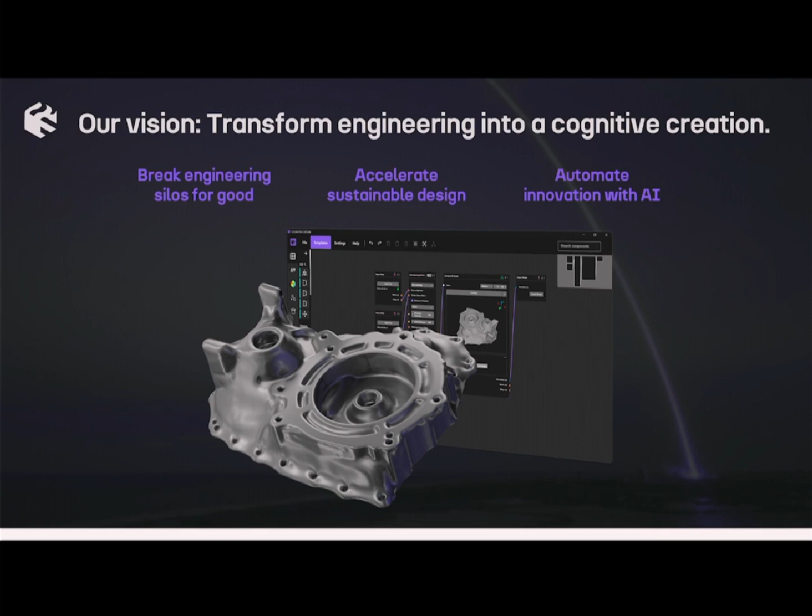I see that a lot of companies presented just before us have also that ambition, and we are all in for that together. We want to accelerate sustainable design. That's maybe a very European thing to say, but it's very important, and I truly believe it has to be the focus of engineers of tomorrow. And we want to automate innovation in the right way by using AI, but in the right way to make it useful.

For that, we are relying on our technology enablers. We developed our own implicit modeling kernel, which gives us enough flexibility to modify and optimize the geometry in the best way possible. We combined it with data-driven design decision algorithms, so we do manufacturability analysis, cost analysis, and carbon footprint analysis, and we couple it with our optimization solvers so we can improve the whole design much better.

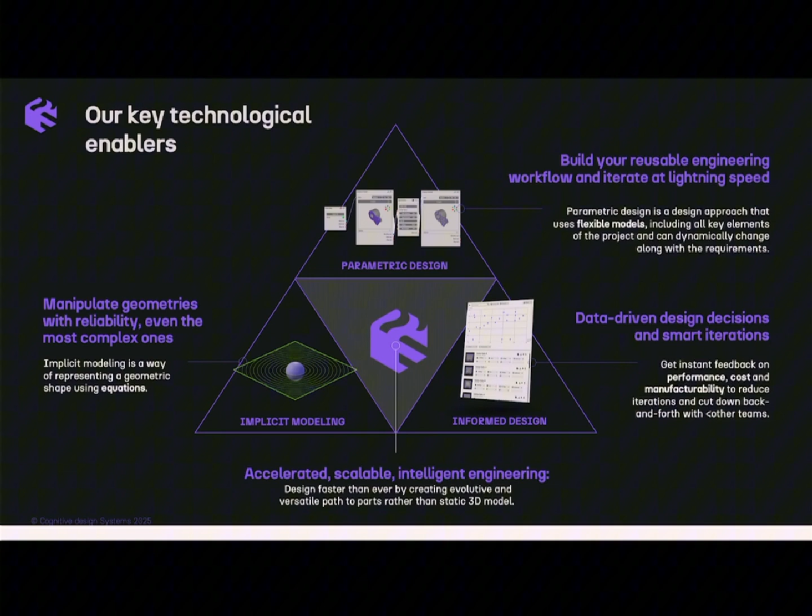And at the end, we have our UI and UX, which is very user-friendly, where we are able to create reusable engineering workflows and iterate faster. By doing that, the whole idea is to create accelerated, scalable, intelligent engineering. That was not the real idea, creating assumptions on Illuminati, but it looked like that a little bit.

So how are we bringing concurrent engineering to our workflows? For concurrent engineering, we start with engineers first. Engineers who want to start from some specifications, could be functional regions, could be what kind of material, what kind of cost we want to achieve, and we end up creating the best possible design.

On top of that, the know-how that engineer has created could be used by the engineering team. It could be different engineers from the manufacturing side, from the simulation side, and they can collaborate on the same product, on the same project, in the best way possible. At the end, this whole workflow has to be captured as engineering know-how by the organization, so they can reuse that engineering intelligence for other purposes, for the same family of parts, for example, in order to accelerate the whole product development cycle.

To do that, first of all, we started creating our own algorithms. I'll talk a little more about it. Topology optimization has been talked about quite a lot, but we believe that topology optimization serves pretty well in certain specific fields, but not for all use cases. So we started creating new, use-case-specific optimization algorithms. I'll present a little later how we do that.

Design exploration is also something that has been focused on today from Altair, from nTop, from Synera too. That's also very, very key, but our approach is to make sure that each design that's generated is manufacturable. We know the cost, we know the carbon footprint of it, and in that way we can take the best decision while selecting the design.

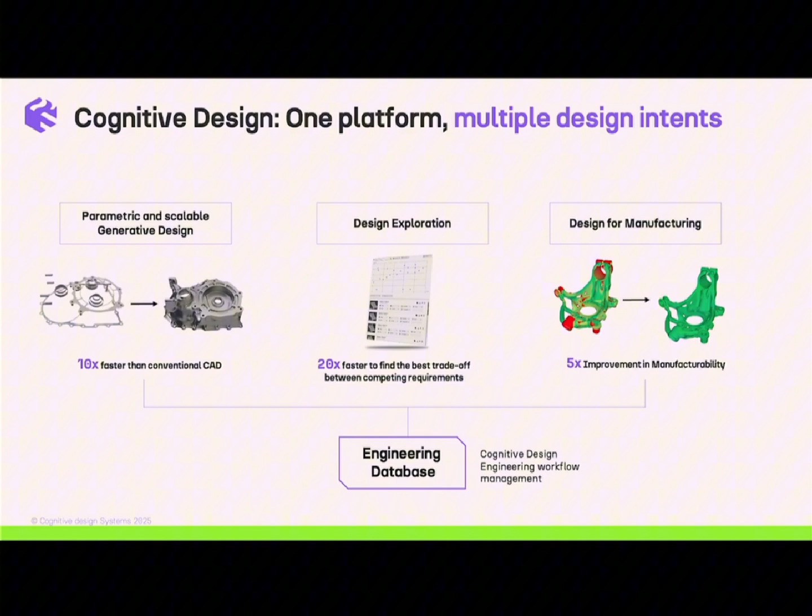And at the end, of course, our core pillar is design for manufacturing. Assessing the manufacturability early on in the design cycle is very important to make sure we don't bring out some artwork - nothing against artwork, but if the part isn't manufacturable, what's the point of the design? Making sure of that is our key priority. And by doing this, we create our engineering database.

So here is the first optimization algorithm, topology weaving. It's a name we gave it - I'm open to discuss how we can name it better. It's simple: we wanted to connect functional regions between them in a confined region, like topology optimization, but we wanted to make sure it's completely parametric. So we can reuse, we can modify geometries locally, or modify those parameters to refine or fine-tune the algorithm.

So what we did is connect it with a manufacturing analysis solver, we connected it with a stress solver, and we assess, okay, what's the best way to connect those functional regions? So we have simple connections, but then we assess that the stress is there, so let's modify it, and we modify the geometry accordingly. It could be splines, it could be surfaces, so you can come and modify those geometries much better, with full flexibility.

A small example, just the same part that we designed with different design intents - one in additive manufacturing, another in die casting, another in machining. You can see that the results come out of the same algorithm, but as it's been driven by manufacturing insights, the design is completely different.

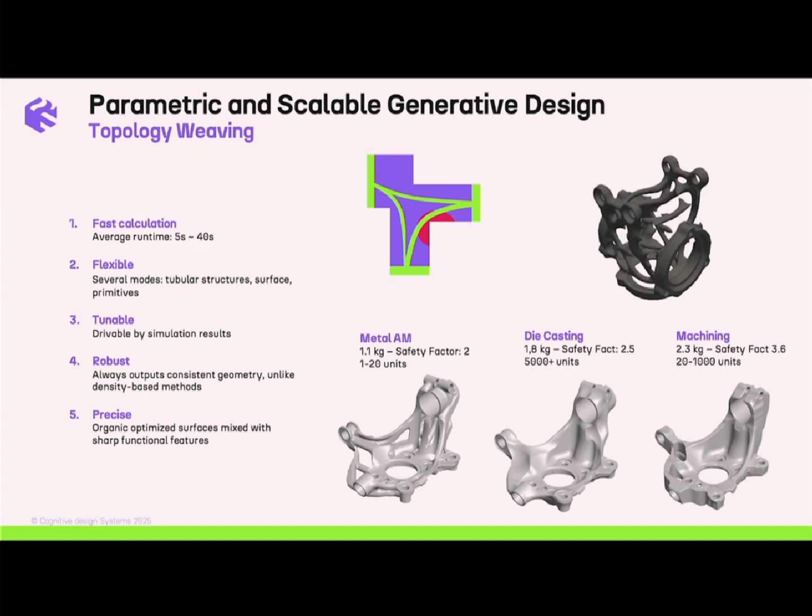I don't know if it's visible. Yeah, there you go.

Another algorithm is generative enclosure. Something that was missing in topology optimization was that we can't always create watertight geometries. Those watertight geometries - because inherently topology optimization will create generative designs which have a lot of holes, looks beautiful, but if you have to put some oil in it, put some other stuff, it's not possible. So this algorithm was very simple.

We bring in the functional regions as they are, and it automatically creates a surface which connects all the functional regions with the same thickness. This allows us to very quickly create a first geometry that you can iterate with simulation-driven design.

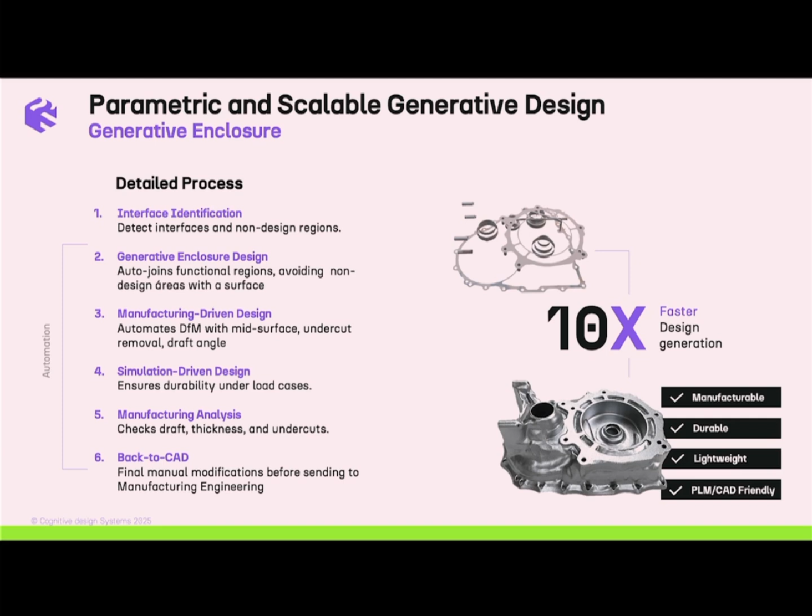So you can modify the thickness, add ribs, add stiffening elements to make it more performing, at the same time keeping manufacturability in check. We have all these different algorithms - of course we also have topology optimization, but I'm not presenting it since it's already been discussed quite a lot.

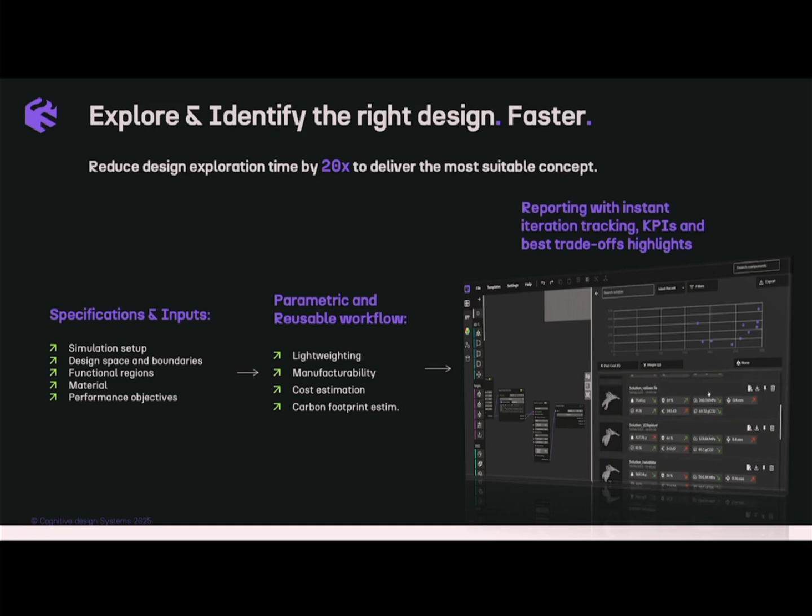We can generate lots of different concepts, and these concepts have to be analyzed and validated. For that, we have our Design Explorer, where you can actually map out all the concepts that have been generated. You can compare cost, carbon footprint, different performance levels, various KPIs, and select the best part suitable for your specific requirements from the very beginning. This could be done completely automatically and could be reused.

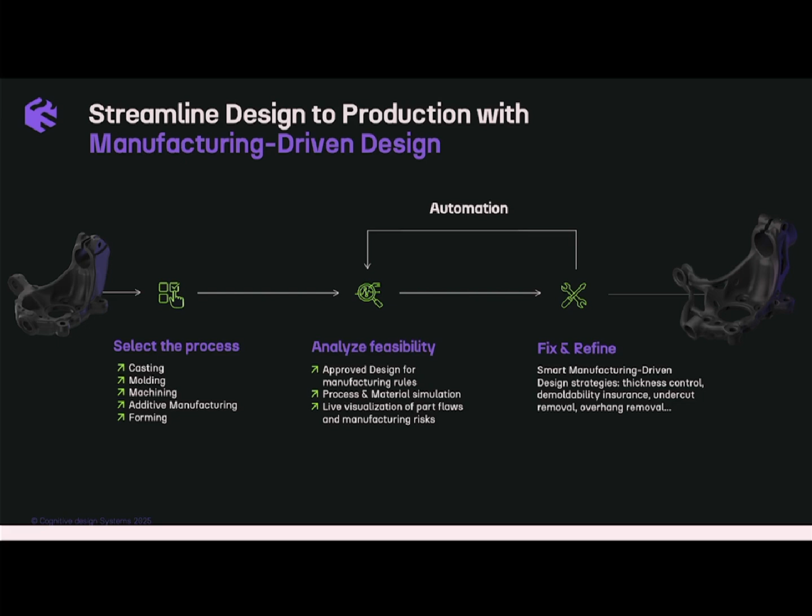So let's talk about manufacturing-driven design. First of all, we select the process we want to manufacture with - could be die casting, molding, machining, additive manufacturing, or other processes. We assess the feasibility of it - we have our algorithms which allow you to assess where the risk with manufacturing is. Then we have other algorithms which automatically modify the geometry to make it more manufacturable. Very simple, but effective, and that could be done very fast with full control from the user.

And all these workflows have to be done in a way that it's reusable, so we can create a reusable workflow. You can take one part, one design space, optimize it, and use it for project A. Now this workflow has been created, it could be more or less complex. You can give it to your colleague who has different requirements. He can bring in another part, which is completely different, but he can reselect the functional regions and apply the loads and regenerate the model very fast.

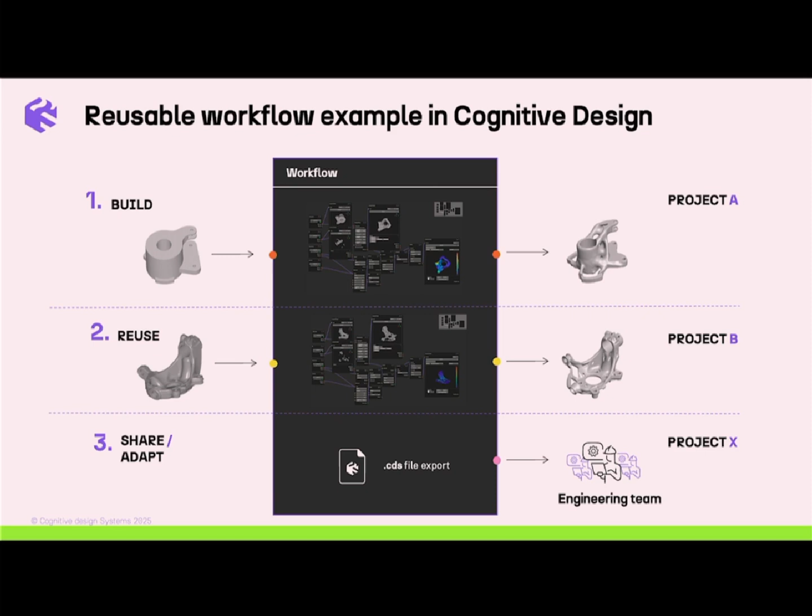This reusability of sharing those workflows, with or without the 3D models inside, is very important, and that's what we see at our customer level, that they are reusing it fantastically.

First example here from the aerospace industry is the aircraft door bracket from Potez. It's a supplier of Dassault Aviation. Of course, France, Toulouse, we turn around those people very quickly. The idea was, okay, we have a concept here, we want to create the new door for the Falcon 6X that is coming. What is the right way to manufacture this part? So let's explore.

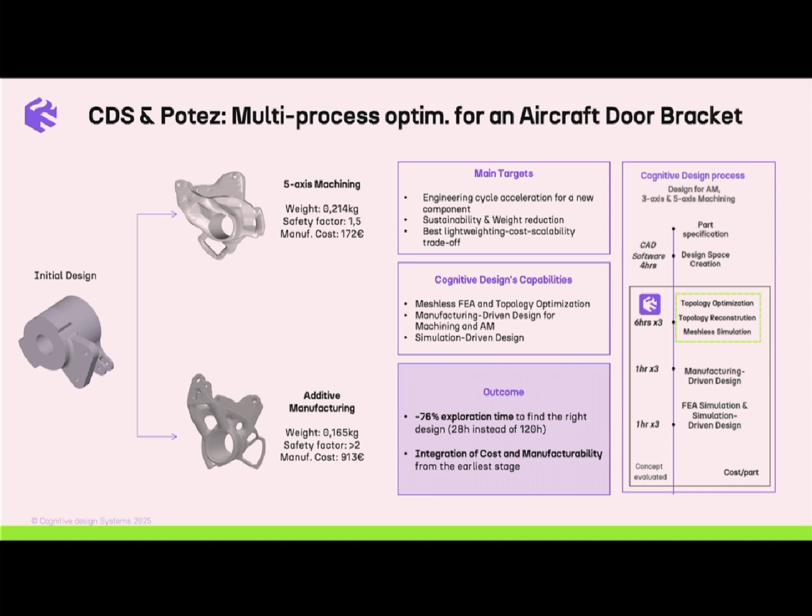Design for manufacturing, so for 5-axis machining or for additive manufacturing. By doing that, the whole exploration time was reduced dramatically. We were always aware of the cost and the manufacturability of those components, which was a real advantage here. We were able to bring out the most optimized part, which was 5-axis machining and not additive manufacturing, because of course the cost was not the same. And it was displayed at Bourget last month.

Another example from the new space industry, from T4I, a satellite propulsion manufacturer. They wanted to create a fuel tank, a pressurized satellite tank, and explore the possibilities of what they can do. 150 different lattice variants that they used internally were analyzed in half a day or a little bit more than a day. At the end, we found the right one, which had the best performing criteria, was relatively easy to manufacture, and was also what they were looking for. The stiffness level was the best.

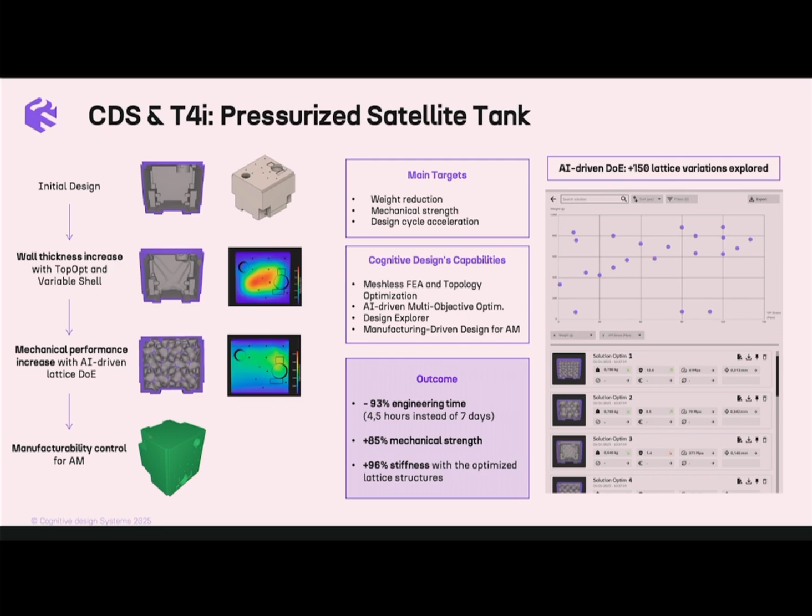All this, now we are talking about our research part, which is coming by the end of this year. My CTO is here, he can confirm it. We are working on multidisciplinary optimization. That makes a lot of sense because we want to automate the optimization for cost, for carbon footprint, and it has to be done automatically also. The user can always have the parameters that he can fine tune, but we also want to accelerate that.

By using surrogate modeling and by using our homegrown optimization algorithms.

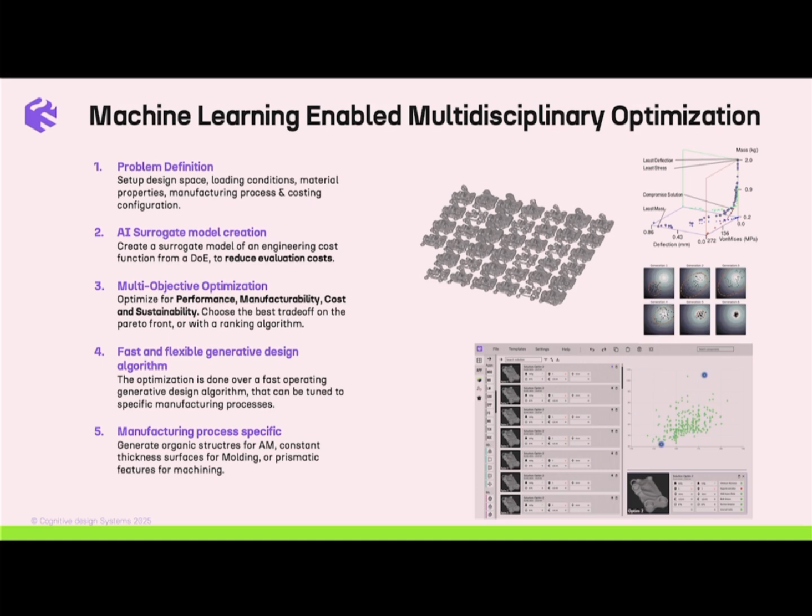And the last point that I want to discuss is also something that has been a bottleneck for the industry, which is conversion, because all these implicit models and mesh models are great, but we had to bring it back to the CAD because 99% of the people, and I'm sure people from the Dassault Systemes here can confirm, if we can't bring it back to the CAD, we can't bring it back to the PLM in the right way, and that could be a problem. So we are spending a lot of time doing mesh-to-CAD conversion, automatically, of course, with minimal user intervention.

We use the mesh, recognition of different features, so primitive features, cylinders, flat surfaces, torus, etc. We recognize it on the mesh, and then we recreate the BREP geometries, so we can bring it back. We can reuse the parametric 3D model. Of course, if the surfaces are curved or anything, that remains in patches, like we can see here, but the functional regions become much cleaner.

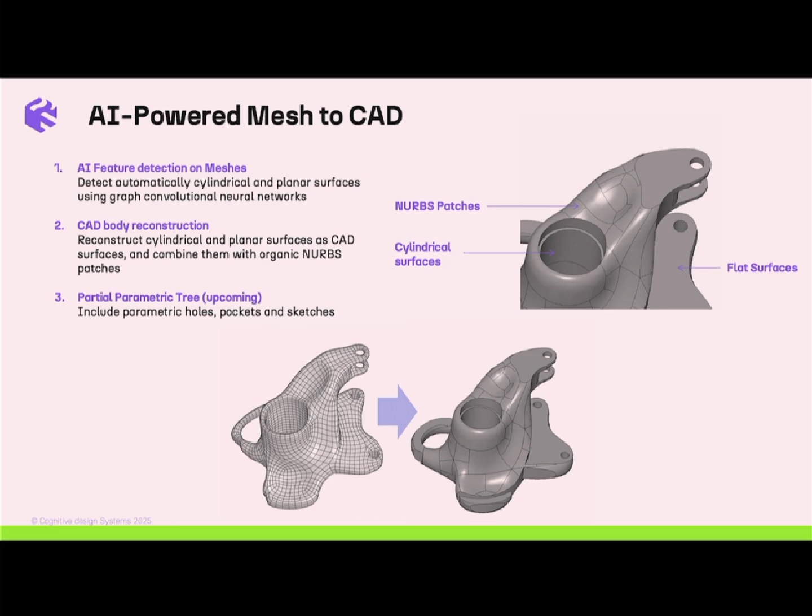This is a little bit complicated to explain in this part, but if you have very simple parts, that can be perfectly converted to the CAD. The beta will be released end of this year, and if you are interested, you can come talk to me and my colleague at any time. Thank you very much for your time.